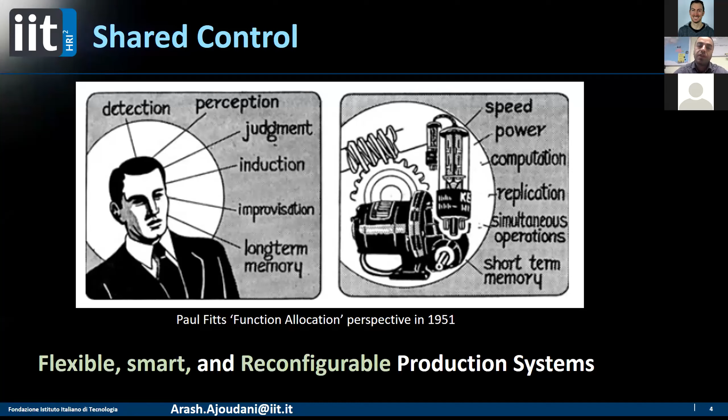As we know, perception and supervision from the human side, and also the endurance, speed, and power of the robot. This has been a very nice and long-lasting concept in robotics for now.

Where these systems can be applied and deployed today, especially in my research, we mostly focus on industry, and we have a lot of problems to respond to. One is the aging workforce - every year there are much fewer people joining the workforce than the ones retiring. For instance, by 2020, we will have an 8.3 million labor gap.

There are a lot of other problems, for instance due to the manual handling of awkward-sized or heavy objects. We have work-related musculoskeletal disorders, which cost hundreds of billions each year in Europe. I'm pretty sure these numbers are just as bad in other countries as well.

Production flexibility is also something we would like to increase by creating shared autonomy robotic systems. But why haven't we been able to see such systems already functioning in industrial applications and similar settings?

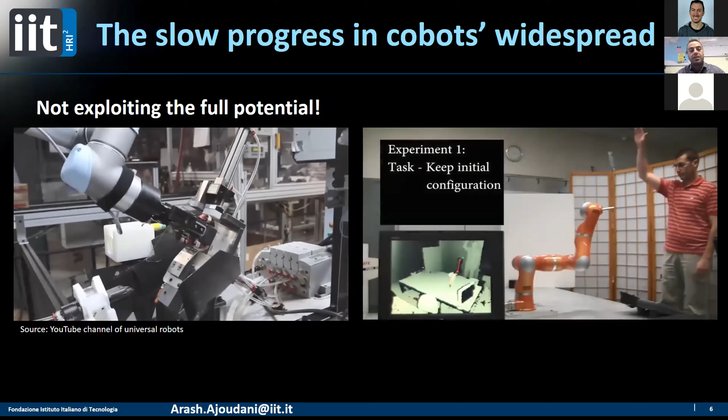On the left side, what you see is a robot with the potential for human-robot collaboration, shared autonomy, or robot-robot collaboration, but they are doing tasks that industrial robots were supposed to do, like pick and place in safety caged spaces.

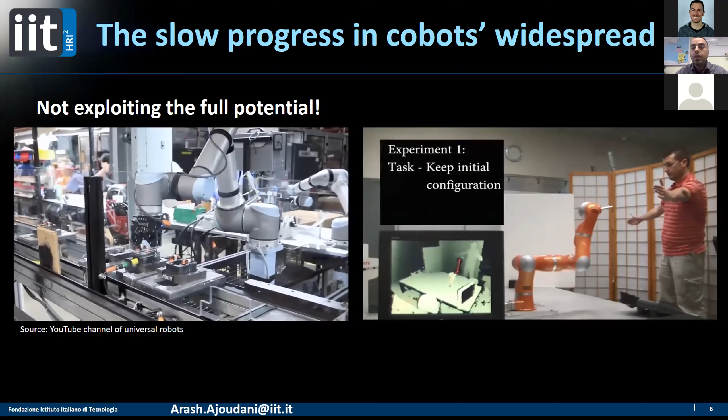When we want to bring humans and robots together to work, it's also good to remember Fabrizio Flacco - I always put his video here. When we bring humans and robots to work, we usually try to avoid any contact between the two, so these two concepts do not let us exploit the full potential of collaborative robots.

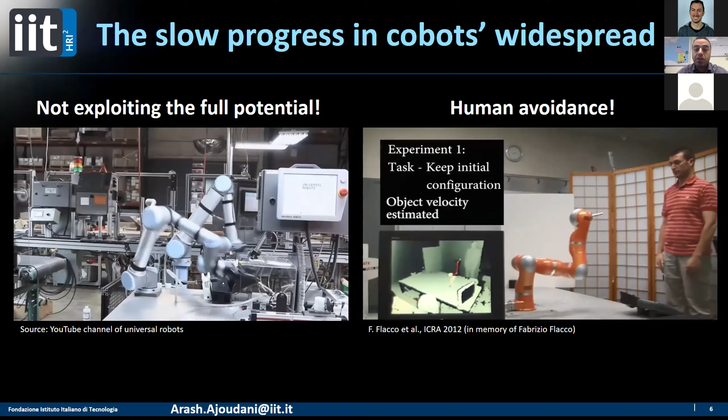We want to improve the adaptation of robots to the environment through some feedback, adaptation of humans and robots and vice versa, and also adaptation of robots to the environment.

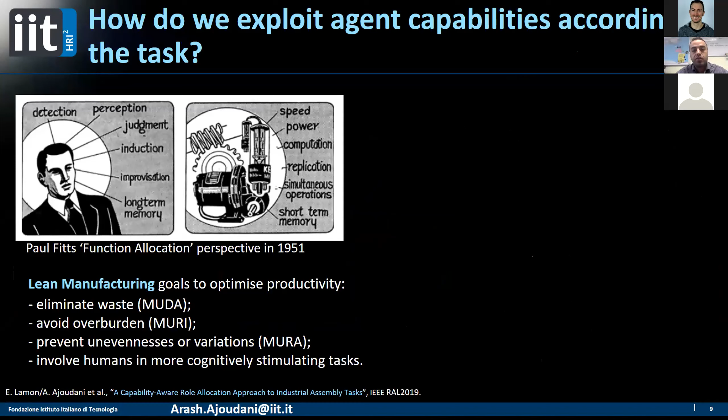To go into detail on some of these aspects, I'd like to highlight some of the work we've been doing. Of course, just having the idea of Paul Fitts in 1951 isn't enough. To translate it into robotics, we need to understand how to take it to the next level. For instance, we can use the good and really rich principles of lean manufacturing.

We want to eliminate waste, avoid overburden, and prevent unevenness or variations. These concepts have been with us for a long time, but we don't see them well integrated in the robotics field. For instance, to me as a roboticist, it means that if I have agents like robots and humans,

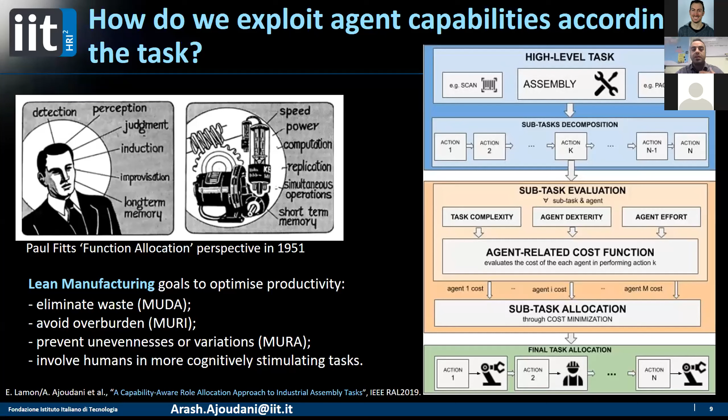I need to assign tasks to each of these agents based on their capabilities, based on their speed, power, ergonomic needs, dexterity, and all that. One example would be decomposing each atomic action of the task according to the complexity of the task.

For instance, robots can do complex tasks, yes, but might take much longer to do it than a human would. And we have agent dexterity, which can basically be the workspace of the person, force production, and things like that.

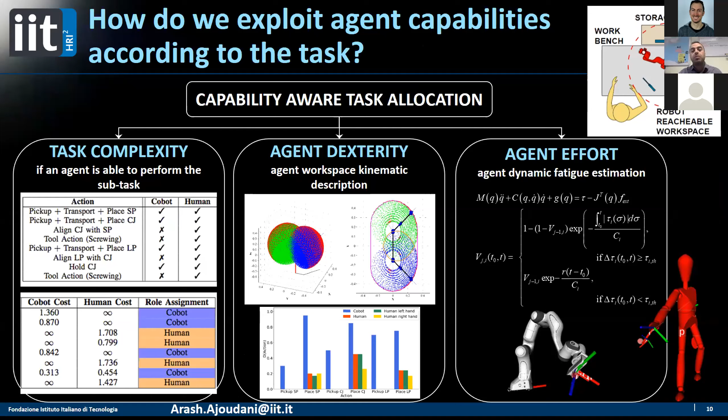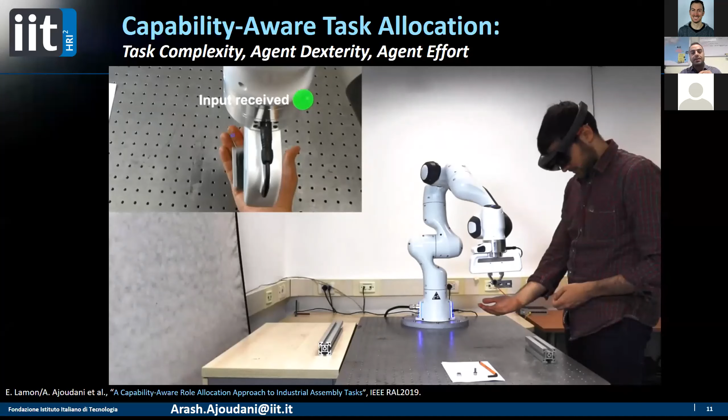And the agent effort, which at the end of the day is how much effort each agent spends to perform a task. If we bring them into a unified control framework, what happens is that you can assign the roles between humans and robots. As you can see here, the robot decides which tasks are best to perform to minimize the fatigue of the person while improving productivity.

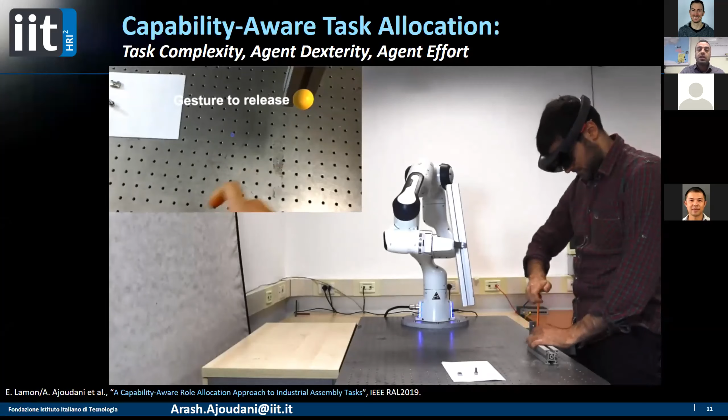Those examples are large movements within the workspace, carrying heavy loads, dealing with sharp objects. But in the meantime, if you have a screwing task, which is really complicated for a robot to do - otherwise you need really special grippers and so on and so forth - you can assign it to the human.

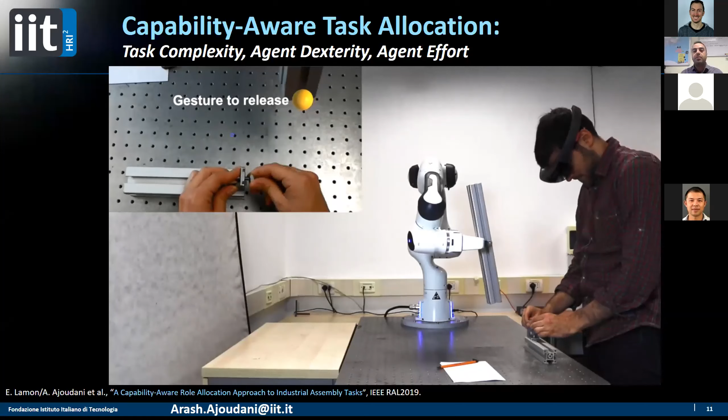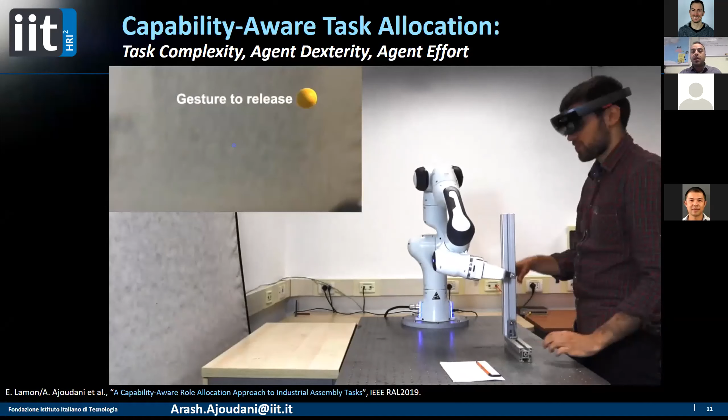To make this communication intuitive, we created an augmented reality interface only to provide some feedback and to get some really intuitive commands from the human. For instance, if the person is doing something, the robot is gravity compensated, waiting for the human to do this complex assembly task - complex for robot assembly. And when it is done with a simple gesture, the robot basically considers the task achieved and therefore goes and waits for the rest of the command.

This is basically one topic that brings a simple example of what it means when you want humans and robots working together. So now that we have this framework, we can actually move it to the next level, which means that we can ask robots to help humans improve their body states, dynamic loading conditions, and things like that.

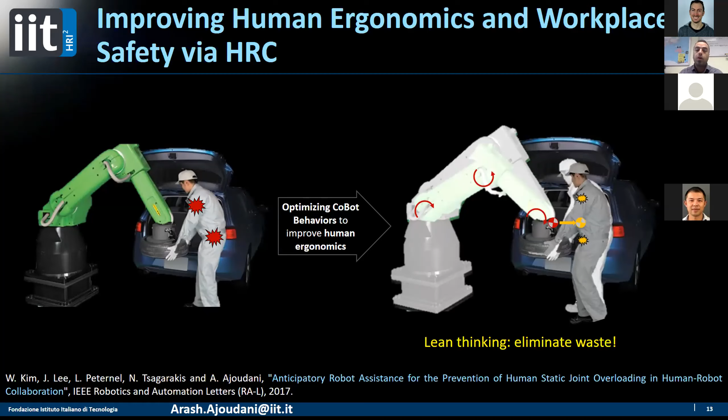For instance, the robot on the right side can trigger and understand what is happening in your body poses in terms of loading, vibration, and forces, and can actually help you, given the constraints, to do your task in a more ergonomic and productive way. So, of course, we need models, we need some optimality, we need some learning.

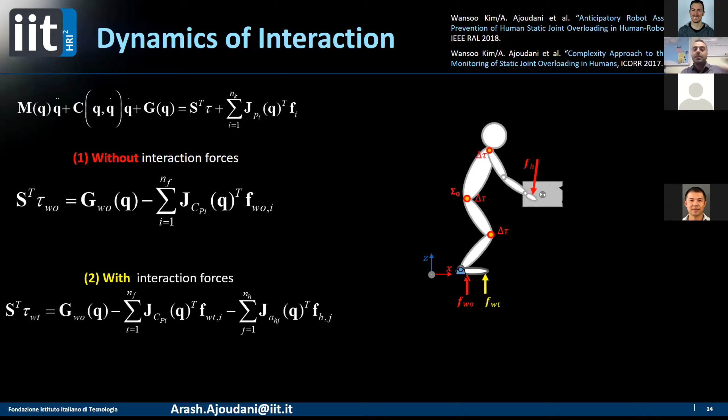Here we are actually relying on humanoid dynamics that we apply to understand the interaction between humans and the external world. For instance, if you write the dynamics of the interaction for the person without interacting with the external world, and then a load appears to be dealt with by the human, we see that the center of pressure displaces, and through some math, if we subtract these two, we can understand the loading effect of this external load on the body joints.

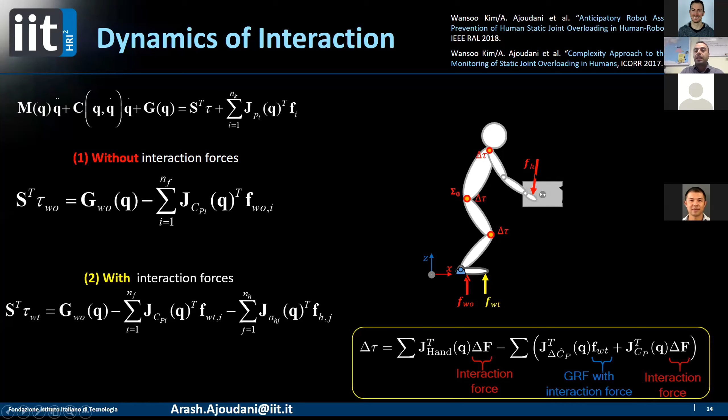So basically, by knowing the center of pressure displacement and also by being able to measure the external forces through the force plates or sensor insoles - this is one example. If you're interested, you can read the papers on how we do that.

Basically, overloading torques in real time, which is the most important factor for us, are estimated across body joints by this reduced complexity technique. This reduced complexity doesn't need the inertia parameters or gravity parameters of the body limbs, and this makes our calculation way more real-time, efficient, and personalizable to each subject.

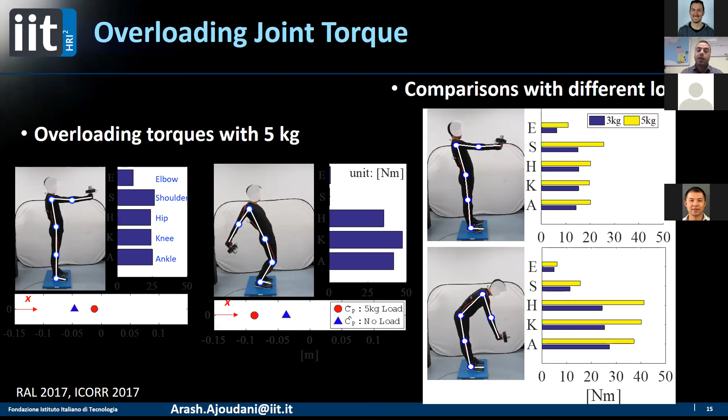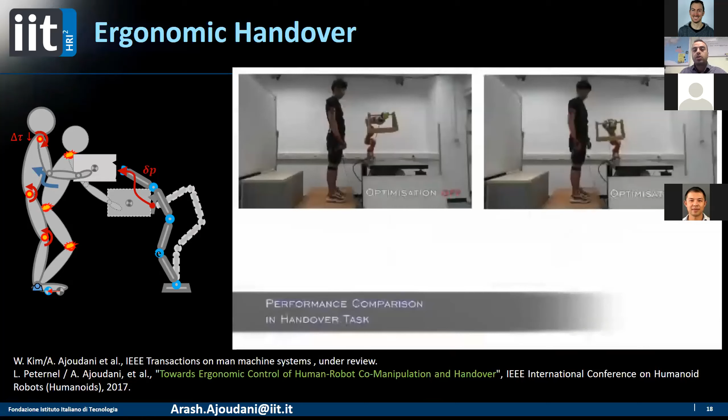Let me give you a simple example. For instance, in a simple handover task, out of infinite amount of locations that you can hand over, there is one that can be optimum in terms of loading. If this happens hundreds of times per day and you multiply it over the years, this loading can be really dangerous, right? But you can actually reduce up to 90% in the shoulder and up to about 62% in shoulder and elbow.

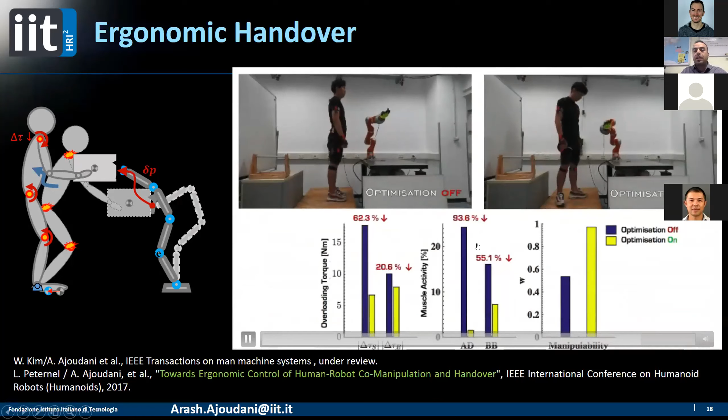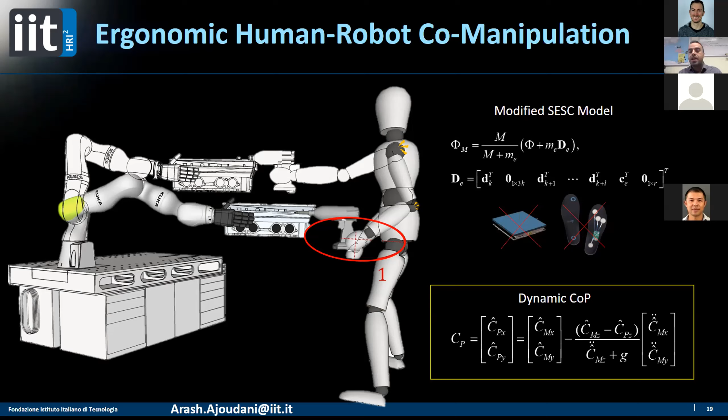And these are the EMG values that actually tell you that this is increasing depending on where you hand over. If we move to way more complex tasks, for instance co-manipulation, where so many other dynamic aspects come in, we can extend our model to also improve the force production capacity of the person through really nice robotics features and tools that we have, such as force manipulability, system manipulability, and things like that.

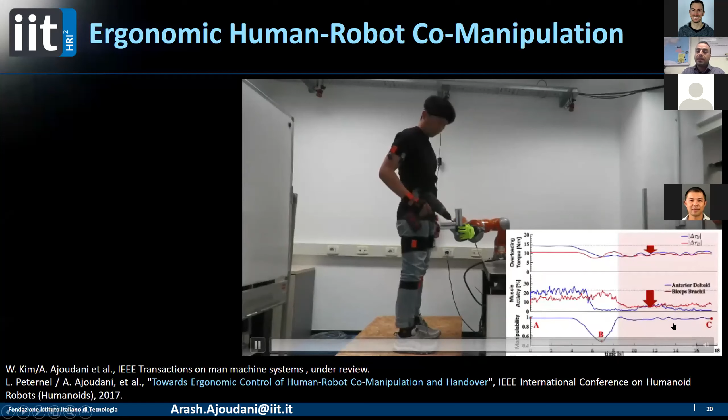For instance, here we have another objective in our optimization, which tells you not only to minimize the overloading joint torques, but also to optimize and maximize as much as possible the force production or kinematic manipulation capacity of the person when performing the task. And you could see here from A, where the loading is high, to B, where the loadings are low but manipulability is bad, and C is the optimal configuration, which optimizes both cases.

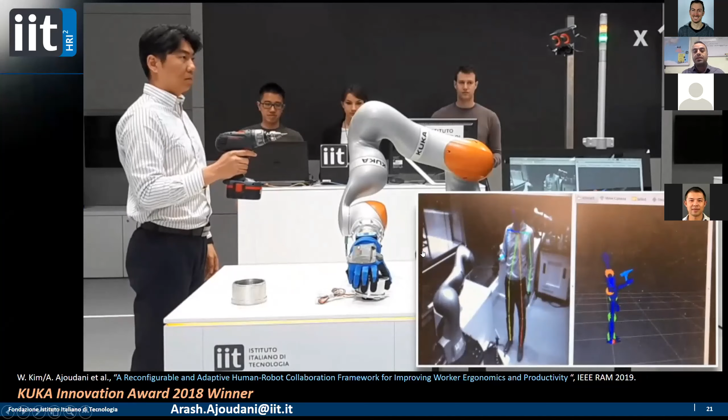We built on top of this shared autonomy and embedded some more elegant, smart features, so that the robot, by looking at the skeleton of the person, this time using only the vision system, can estimate the load of the object, put it in the model, and also through visual feedback provide some means of what happens at the loading level. So if you change hands or move in space, the vision system is highly adaptable, and the control and optimization system is highly adaptable to respond to the person's needs, always ensuring the task is performed in the most ergonomic, productive, and fastest way possible.

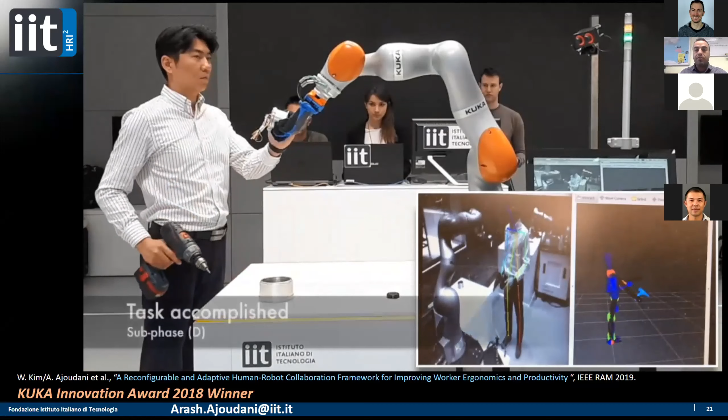Of course this goes all the way, and if you're interested you can see the results. This was a winning application in the KUKA Innovation Award 2018.

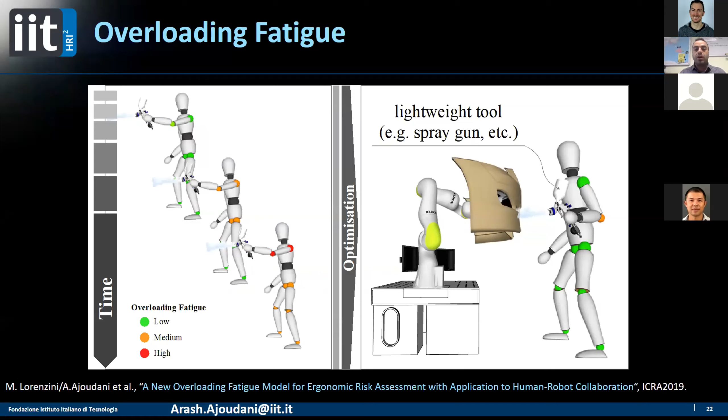So not only in shared control do we care about the instantaneous effects and states of the robots and the humans, but the cumulative effects across time can also be important. For instance, if you're doing lightweight tasks with robots, such as painting or carving, this can across time increase the risk of injuries in different body joints. You can see here the circles getting orange and then red across time, indicating high risk if you continue doing that.

So the robot realizes that you want to stay in that point for a longer period of time and brings you to the most convenient configuration, enabling you to do the task.

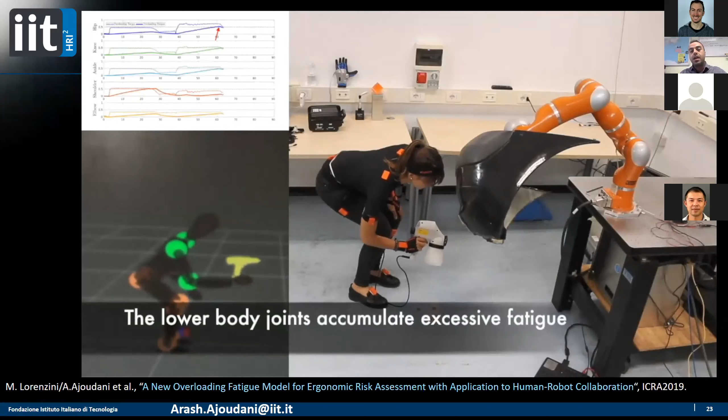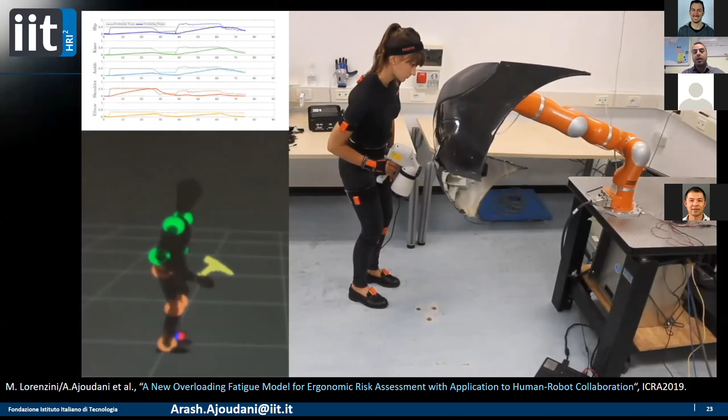Just to show you that the system is whole body, we did it in another configuration. This time the ankle and the hip were being loaded, and the robot again, by calculating the fatigue, anticipates what would be the best posture if you want to stay in that particular area for a longer period of time, and optimizes it to bring you into a really good condition.

So far I talked about fixed-base robots. To bring you to the real title of this talk, the new mobile platform that we have developed: as we all know, fixed-base robots are extremely valuable, but when locomotion is required, you have way more flexibility in any production or service application you would like to have. As the Greek philosophers always said, that which is in locomotion must arrive at the halfway stage before it arrives at the goal, which this slide counts as halfway in my presentation as well.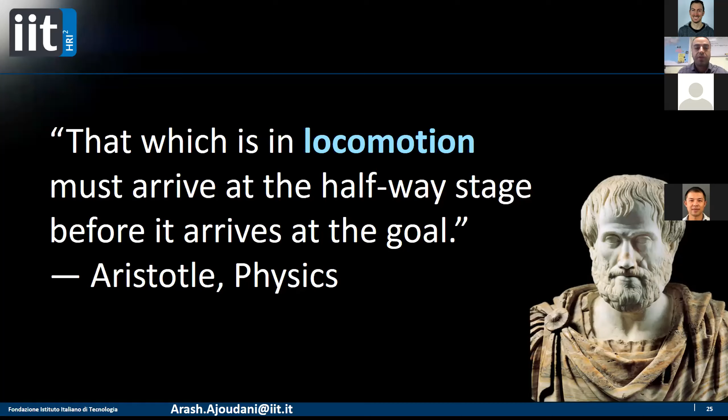So to respond to this, we created MOCA, which stands for Mobile Collaborative Robot Assistant, which is the integration and customization of some robotic components.

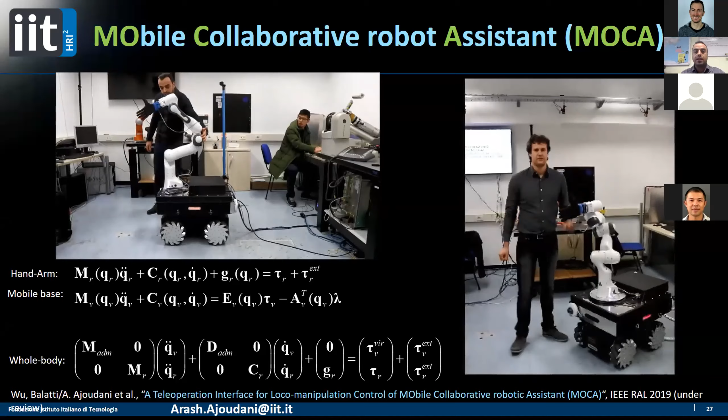Now that we created this system, we can expand this shared control to a larger team, which can be several humans.

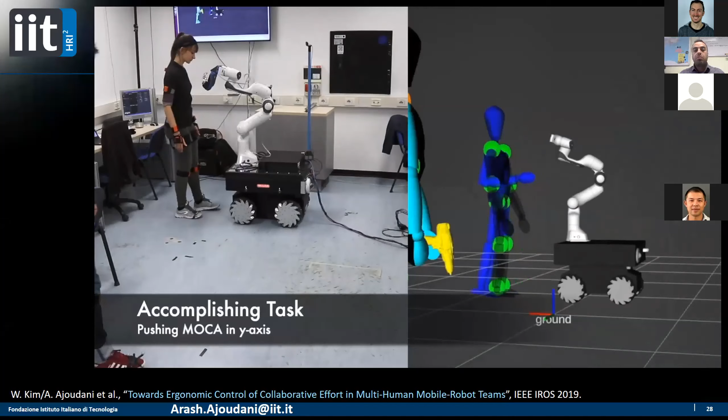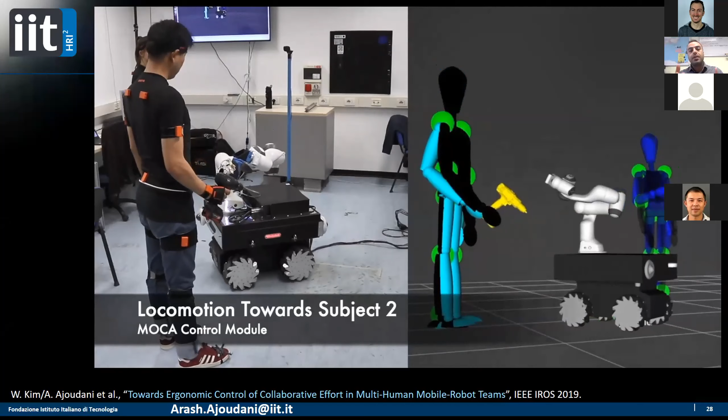Relying on what we built before, the robot can, through the vision system, also understand the intention of the people and bring the task to a configuration that minimizes the loading, making it as ergonomic as possible, and maximizes the interaction capacity of the person.

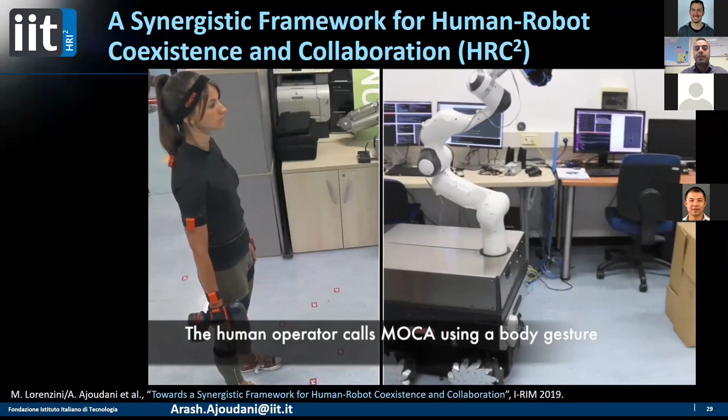Then we extended this to understand who is your collaborative person and who is just a coexisting coworker. Here, through our navigation and our laser scanner and RGBD cameras fusing sensory data, the robot understands that this person was not meant to collaborate with, and therefore it responds to the worker who actually called MOCA to arrive and perform the task together.

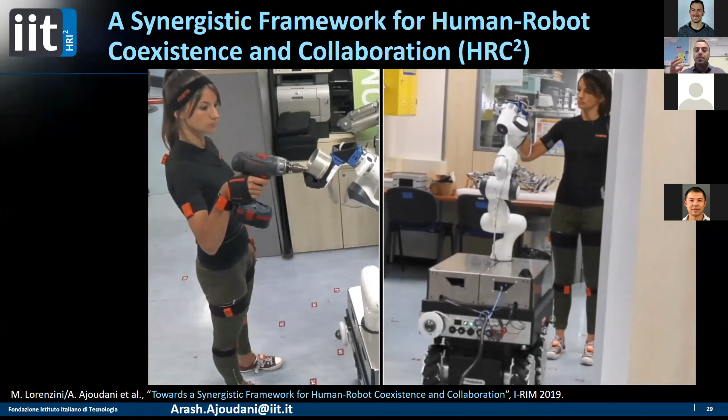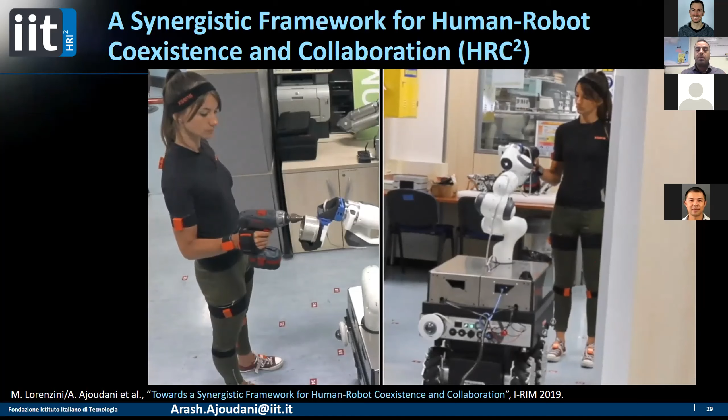This is a new concept we introduced, which we call HRC2: coexistence versus collaboration. Of course, not always do we want direct connections with robots. Most of the time, robots must coexist with people, so all the avoidance, safety, and security measures, which are highly important, must still be validated.

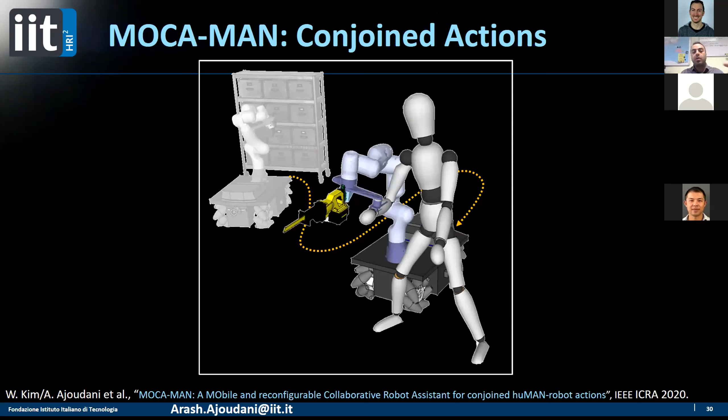We also thought of creating a supernumerary body, one of the papers we're presenting at this conference, where humans and robots can physically couple in a very safe way to bring shared control in a way that's smarter, stronger, and has more endurance. There's sophisticated control behind this; if you're interested, please read the paper and watch the presentation online.

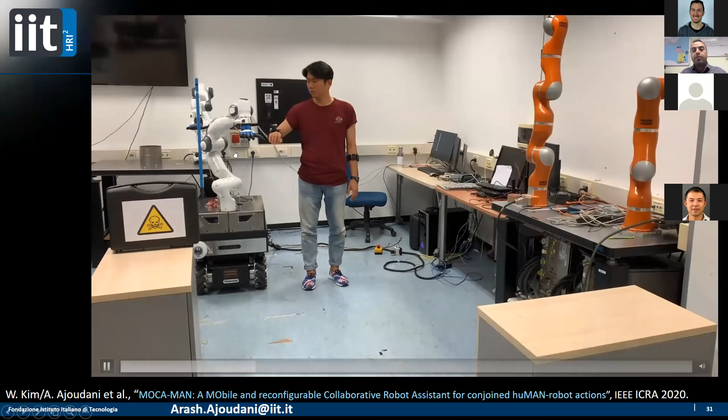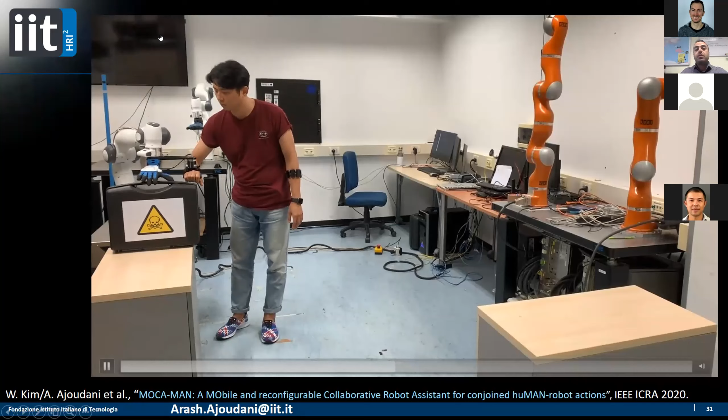What happens here is that through some gestures you can call MOCA, which we call MOCA man, and through a safe admittance interface using magnets, you can clutch and attach very simply and safely. In that moment, the robot becomes your supernumerary body, and you can exploit its mobility through gestures that move the base or the arm. Here, for instance, we use gesture to control the arm, letting you do whatever you don't want to do with your own hand.

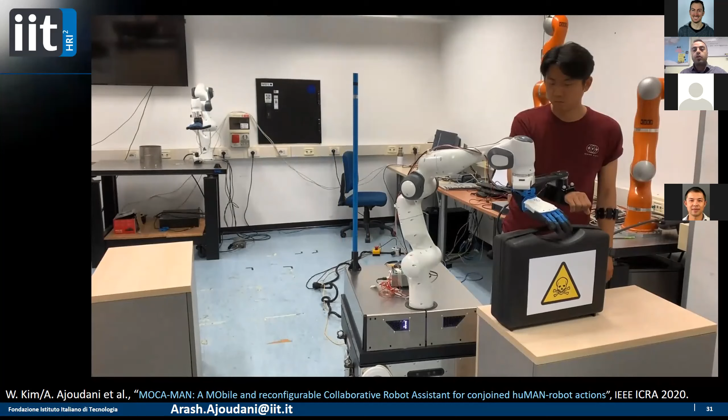You can carry heavy objects, carry samples like viruses, which are a very hot topic these days, and interact with environments you don't want to engage with in real life. In industrial tasks, carrying high loads becomes even more important. Whenever you're done, you can simply and easily detach your arm, and the robot continues doing what it was supposed to do before.

In contrast with exoskeletons, you eliminate variability in time, the time to put it on, take it off, calibration needs, and so on. This adds a lot of configuration and flexibility to our production systems as well.

It's also helpful compared to doing tasks manually; using MOCA man, we show a really high reduction not only in loading but also, in most cases, in other stimuli like vibration when performing the task, highlighting the potential of MOCA man in industrial applications and maybe in rehabilitation, which we're looking into for the near future.

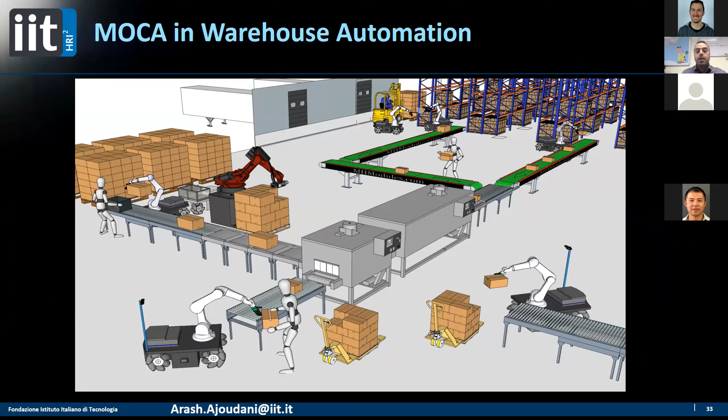Then we started looking at applying MOCA and this high-level intelligence and shared control to logistics applications, another paper we're presenting. The idea is: what if humans and robots can work together on repetitive and effortful tasks like those found in warehouses?

You may not believe it, but although you see robots in videos moving around warehouses carrying boxes, only about 5% of current warehouses worldwide are semi-automated. So we're working on flexible systems to automate or semi-automate these tasks that currently happen in warehouses.

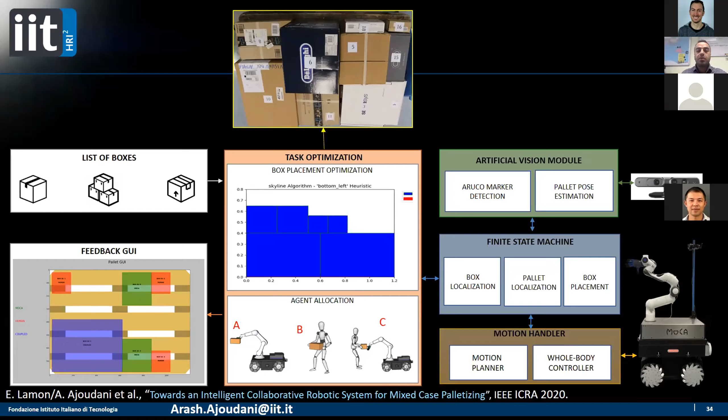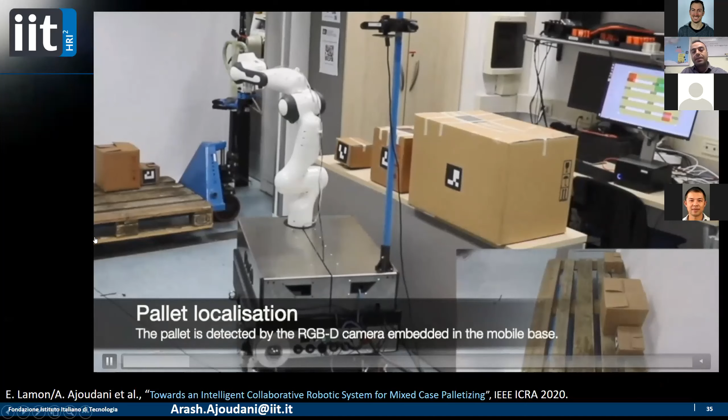One example: through marker perception, you can understand what boxes you have, and through optimization, you can maximize the number of boxes placed on a pallet. This is an online feature we developed. By looking at the Aruco marker, we know the weight and size of the object, though the size can also come from the vision perception system.

When you have this information, you optimize it, and you can place the boxes in the optimized positions to maximize the number of boxes on a pallet.

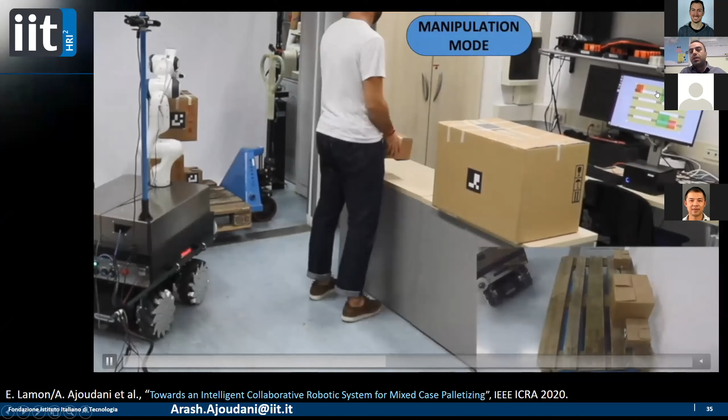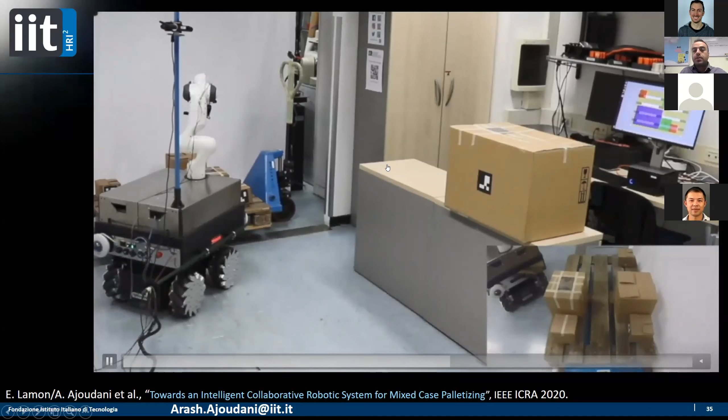On the right screen, you can see it also lets the human contribute. It tells you, according to my calculation, you can move the small boxes that are less heavy, less bulky, and will have less risk on your joints. Sometimes, since the robot has only one arm, it can call for help from the human partner, telling them we're supposed to take it there because according to my optimization, we better put it there to maximize the number of boxes.

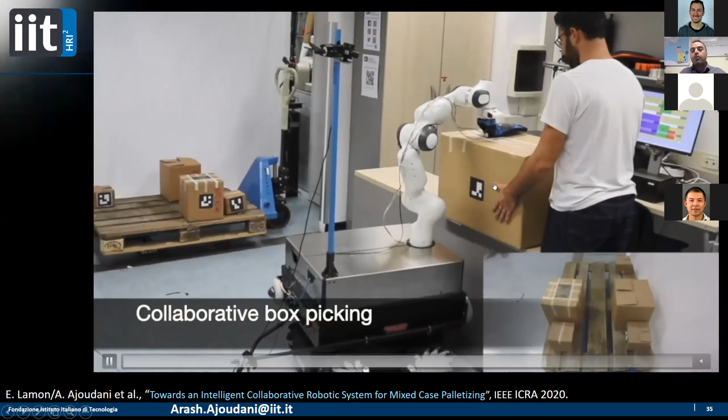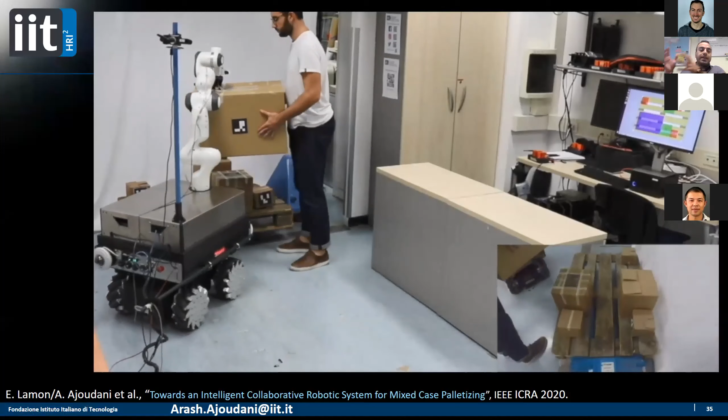We did this with human experiments—you can see it in the paper—that this optimization gave the best placement of the boxes on the pallet jack, compared to humans who had to take it, bring it back, and spend more time figuring out how many boxes could be placed.

So everything you see on the left side, which is the robot, is autonomous, with minimum pre-planning, only by looking at the objects.

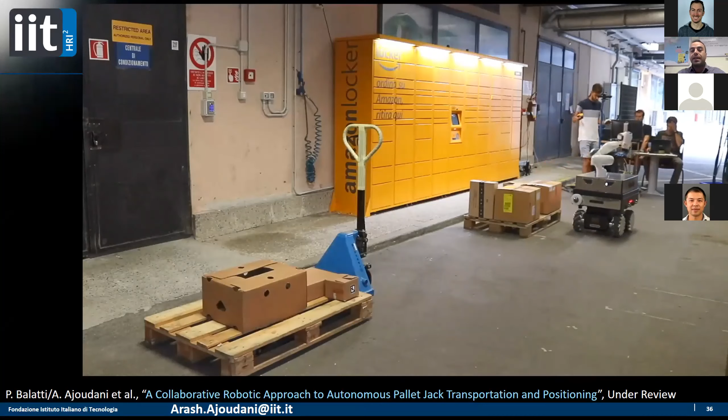So what's next? The next step is when the pallet is full, you can autonomously use the robot to move in the space and detect the pallet jack. Of course, we know roughly where the pallet jack is, but we don't know exactly where the handle is.

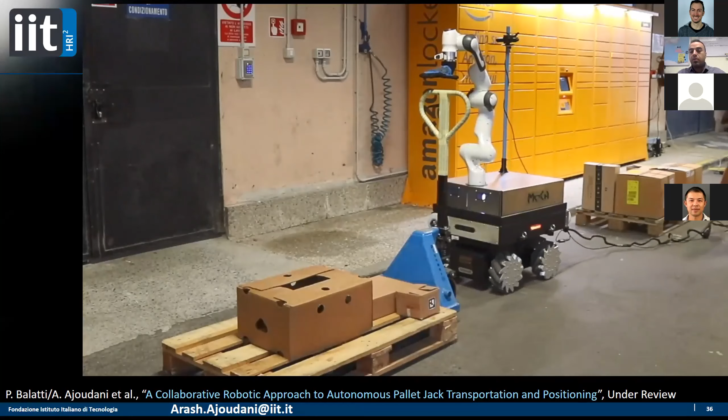This is the same MOCA that approaches the pallet jack through the vision system, detects it, and then starts moving it using the whole body impedance controller that you saw a couple of slides before.

The challenge here is that we have a highly underactuated system when they're coupled, because you have only 2 degrees of freedom—1 rotational, 1 translational—plus all the dynamic uncertainties in the system. So the optimization and planning becomes really complicated.

We have a paper on this which is currently under review, and hopefully it will come out soon so you'll be able to read it. So this also contributes to this task.

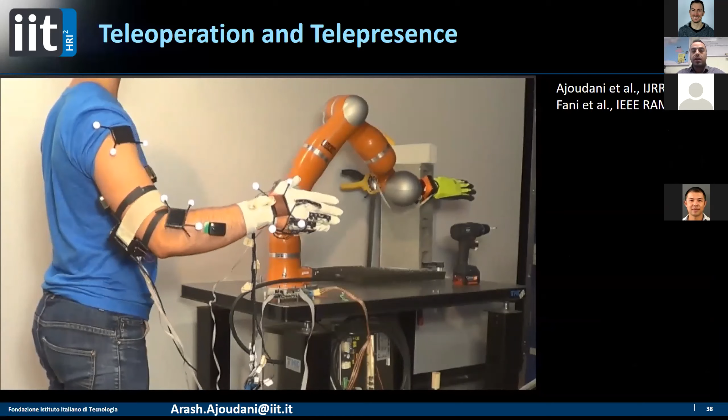My last topic today is teleoperation, which we saw some nice presentations on before. It's a good example of humans and robots sharing control to perform complex tasks.

It started with the concept of teleimpedance control, where we can control the impedance of the robot as well as its trajectories to regulate the endpoint stiffness of the robot based on the human.

What you can do is essentially make the robot soft, interactive, and safe. Imagine a scenario, especially these days, dealing with patients—COVID patients—or at the same time you can increase co-contraction, have a stiffer arm, and the robot will respond to that, allowing you to do high-force or high-effort manipulation tasks.

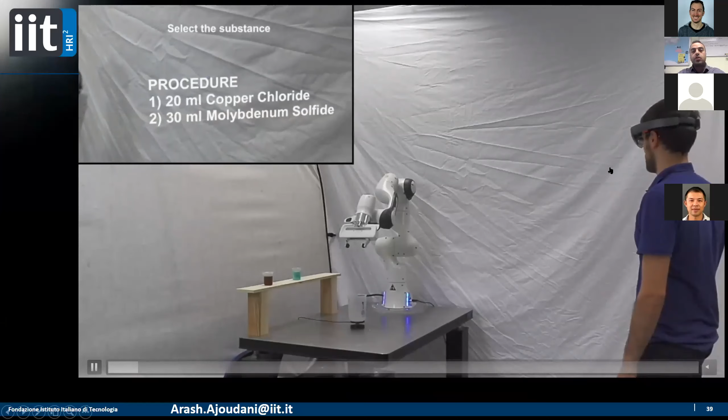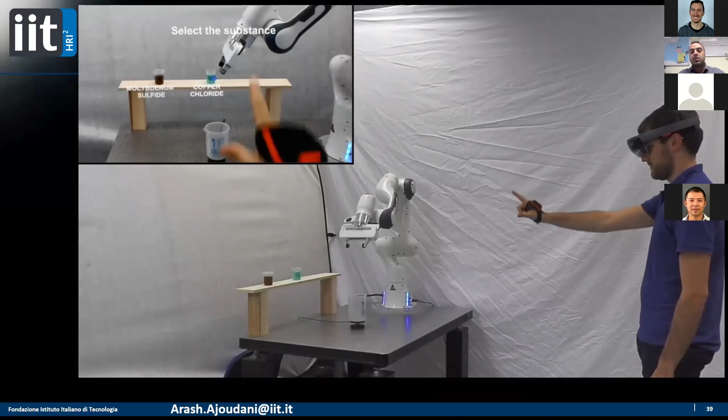Then we included some augmented reality to increase human awareness. You can see this shared control can be really helpful. In some cases, it provides a lot of information through simple gestures, and you can trigger autonomous behaviors in the robot with simple gestures.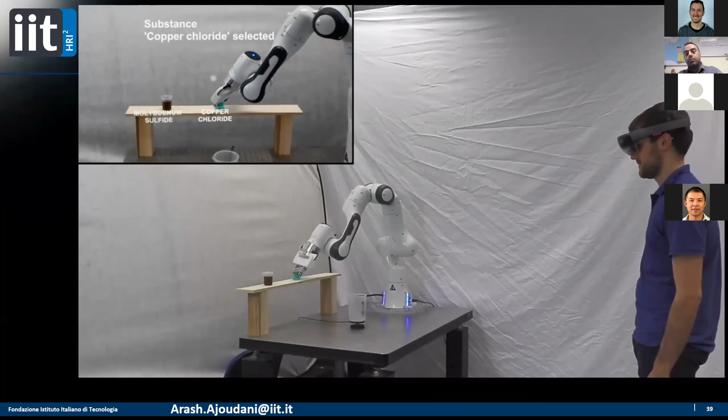Here we are detecting—by looking at the recipe, we understand what material the person is selecting, and the robot is able to bring it for you. But it switches back to manual here.

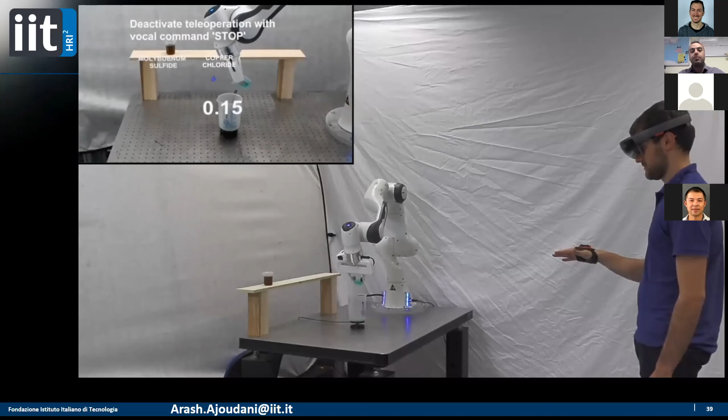For instance, in teleoperation, you can pour as much as you want. By simple rotation, we can understand how much force, how much material is being poured, but we also put a force-torque sensor at the bottom, so it gives real-time feedback.

These are really nice shared autonomy features that can help increase the efficiency of the system a lot, minimize human mistakes, and minimize the number of times you have to remember recipes or go back to books to remember them.

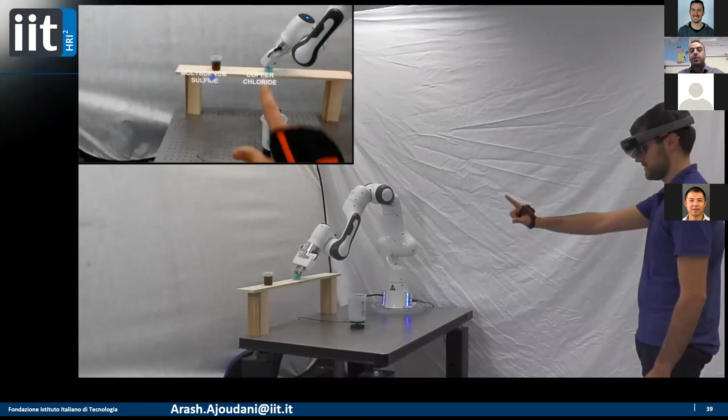So this is the recipe, basically pinned in space somewhere. You go back to that and start looking at it, and this goes on and on, and you can see the data and information.

Of course, this was too good not to implement on our MOCA. What we did was extend this through a whole body model that we have for the human, thanks to our ergonomics studies—so we used that model.

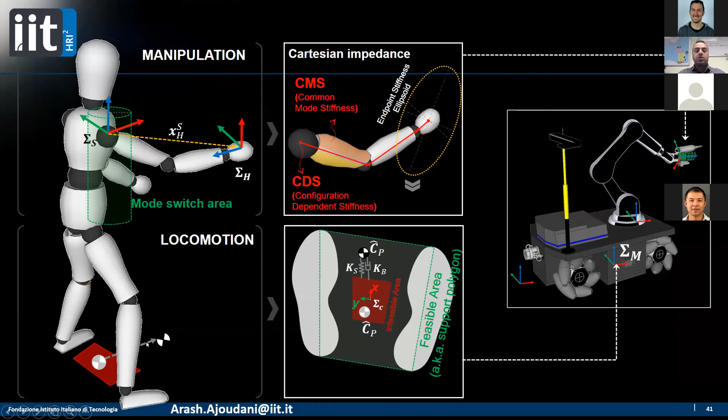We used the center of pressure model, which we use for ergonomics, to steer the robot movement, and we use the teleimpedance control, the video I showed you, to control the robot movements. Here, the robot moves back and forth, left, right, just like a Segway, by inclining forward and backward. The reason for that is we want to leave the arms free.

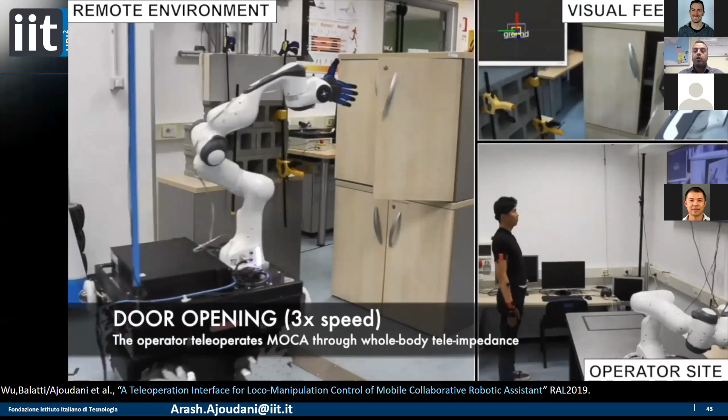Leaving the arms free lets you do these nice manipulation tasks only through visual feedback, even in the presence of some delay, because the system is feed forward. We don't have stability issues because we are providing impedance and position trajectories, and the delays will not cause instability in the sense of classical control.

So you can see that here we are able to grasp different objects, perform manipulation, take the drill, and I want to go a bit faster, do the drilling.

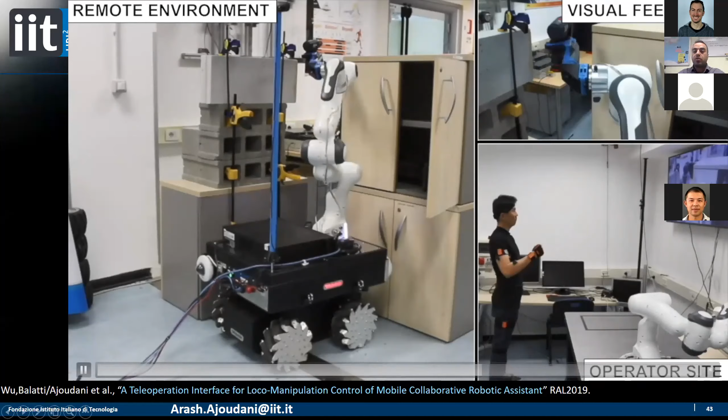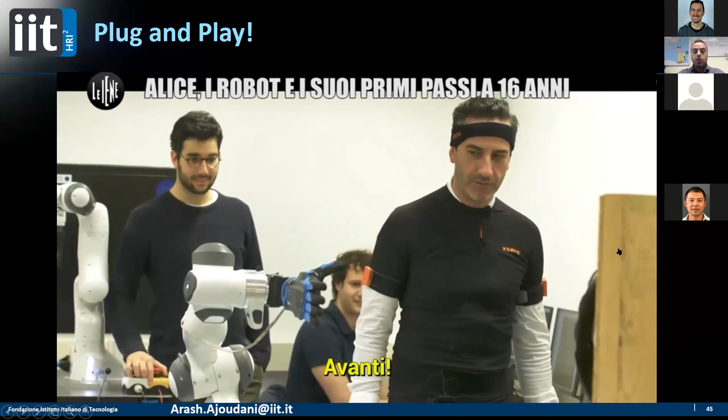If you're interested, we are also embedding some gesture features to understand in what direction the person wants to be stiff or soft to perform the task, and some valve turning and different manipulation tasks. This was too intuitive. A TV crew visited us, and immediately they were able to use it, just like using a Segway or something similar, so they were able to perform some tasks.

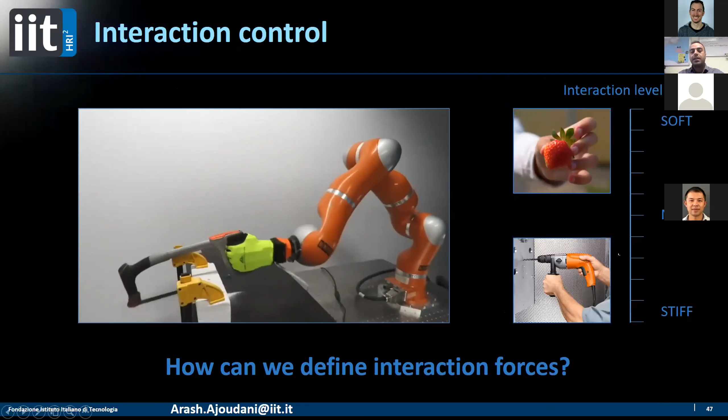I'm not sure if I have time, but just one last video I want to show is when it comes to interaction control. Of course, what we want to do is capture the level of interaction from soft to stiff, but the most important thing is how to plan this, because at the moment all of us are hard coding this required interaction. But sometimes what we can do is actually learn these interactions by exploiting and interacting with the environment.

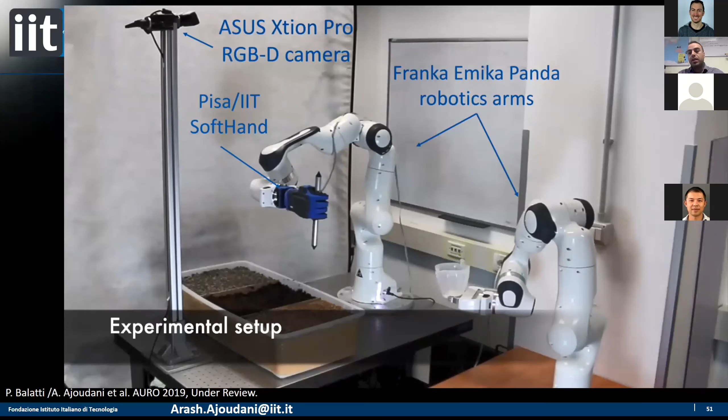And this is the work we presented. It's actually currently an extended version of this under review. What I'm showing here is that the robots can interact with the environment. They can learn the viscoelastic properties, memorize them, and embed these viscoelastic properties into the vision features extracted from the RGBD cameras.

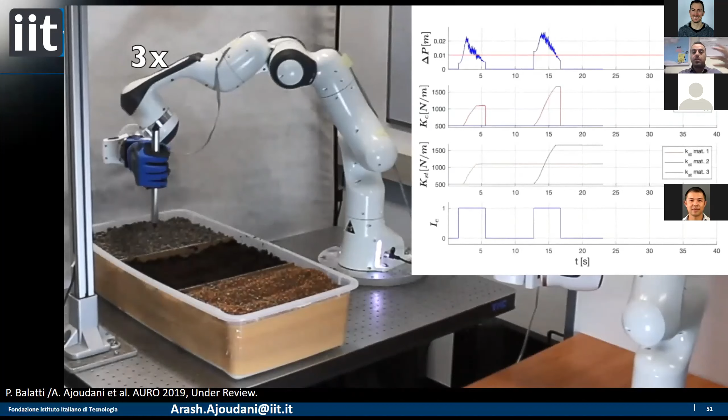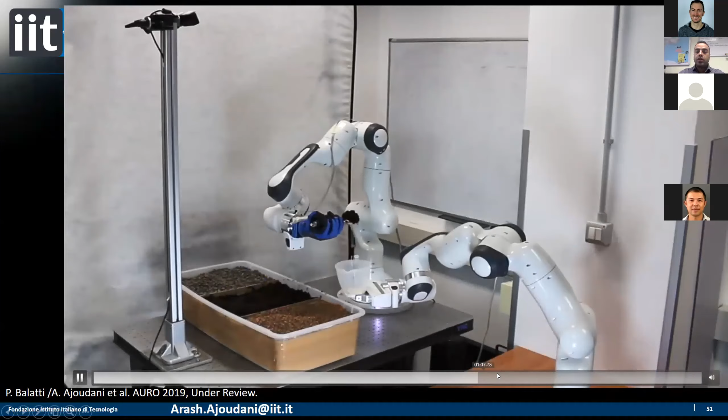So the next time you're performing a task, you know where to start and what stiffness behavior, what quasi-static or dynamic behavior you want to use to deal with the object. Even if you change the environment behavior, the good thing is you're starting from a good guess, and then you can build and adapt on top of that to converge much faster to the best interaction performance. And you can, of course, do some really cool tasks such as scooping or things like that.

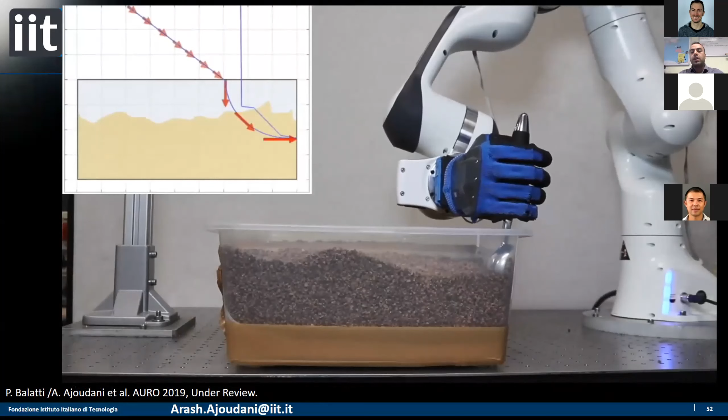And of course, this requires also some intelligence. For instance, here, if you're colliding with the environment, you need some intelligence to understand this is a fault, to trigger a fault and come back to the system.